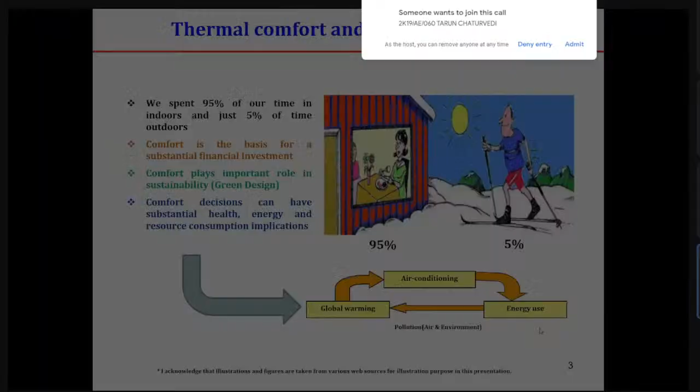Every year we have to spend a lot of money to restore that comfort. So it's very important that while we are designing a building, we should keep the local environment in mind, and also the thermal comfort requirement of the people in mind, and these two factors will govern our building design.

Comfort plays an important role in sustainability also. Comfort decisions can have substantial health, energy, and resource consumption implications, because if we move into a house and it is not comfortable, we will do certain changes to make ourselves comfortable. And since we cannot do anything about the external facade, we install air conditioning, because this is the only option we are left with.

What will happen if we install more air conditioning? We will use more energy, and since this energy is primarily sourced from conventional fossil fuels, it will lead to air and environment pollution, and ultimately it will lead to global warming. As global warming increases temperature, we will use more air conditioning, and this is a vicious cycle that will go on, and we want to break this cycle.

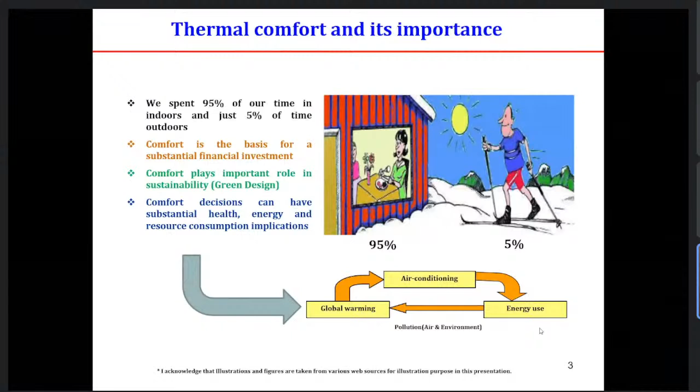So what are the challenges in thermal comfort study? The challenge lies in the definition itself, because as defined by ASHRAE, thermal comfort is that condition of mind which expresses satisfaction with the thermal environment. So it says that a subject in the environment is a passive recipient, and its inherent capability of adaptation and adaptive actions are ignored to a large extent.

So here, whatever environment is given to the subject, it accepts it. It is a passive subject, a passive recipient.

But when this definition is tested in the field, a large number of anomalies are reported, and then the concept of adaptive thermal comfort came into the picture, and it is included in the ASHRAE standard also.

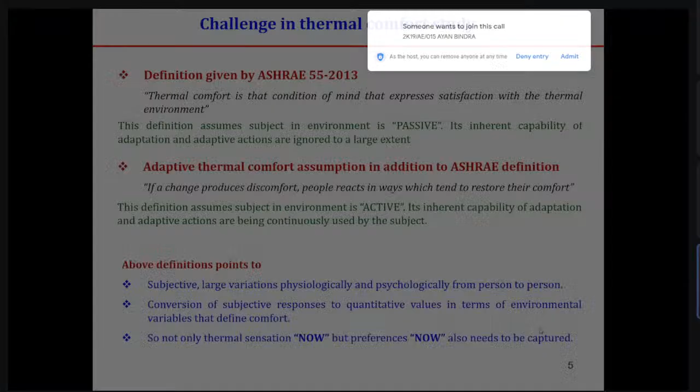It is defined as: if a change produces discomfort, people react in a way which tends to restore their comfort. So this definition tells that an occupant is an active ingredient of the environment, and always takes those actions which restore its comfort.

That is very much obvious if we look at ourselves in this context. So this definition seems to be more appropriate.

And what does this lead to? Because these definitions are subjective, they have large variations physiologically and psychologically from person to person. So the data which we collect has a large scope. And now we have a daunting task, because we have to convert all the data with some statistical tools.

So that we can give an environmental variable, some environmental variable, in a range that defines comfort. Like we have to give temperature range, humidity range, air velocity range in the built environment. So in this range, an occupant will be comfortable.

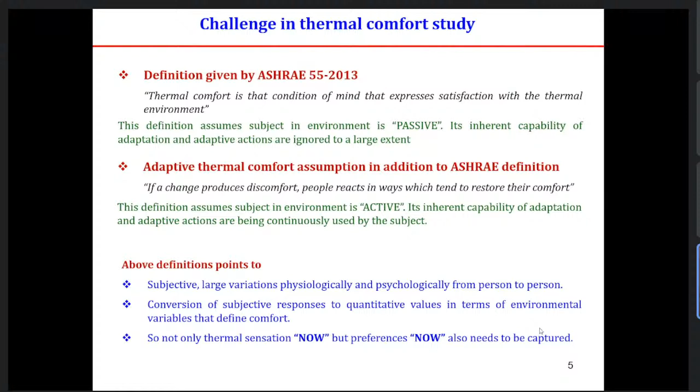So what we do when we go for field surveys is record the thermal sensation data. This tells us how the occupant is feeling now, and also what their preferences are now. So two 'nows' are covered: one deals with the present thermal sensation, and one deals with the occupant's preference, what he prefers. These are very important things that we capture in our field surveys.

Since we know that thermal comfort has a lot of energy implications, let's see the picture of world primary energy consumption. We see that the residential sector consumes about 21% of primary energy. Industry and transport are the highest consumers.

Overall, buildings are responsible for more than 40% of world primary energy consumption, because 8% is responsible for commercial and public services, and buildings are also involved in transport and industry sectors. This data is not segregated specifically, but if we take those things from these three sectors, the share of building energy consumption will go beyond 40%, and this is huge.

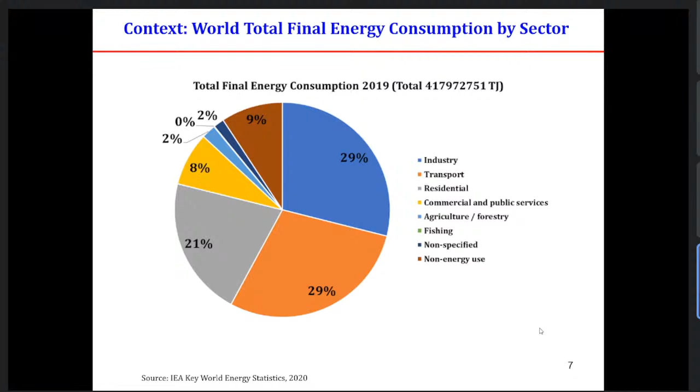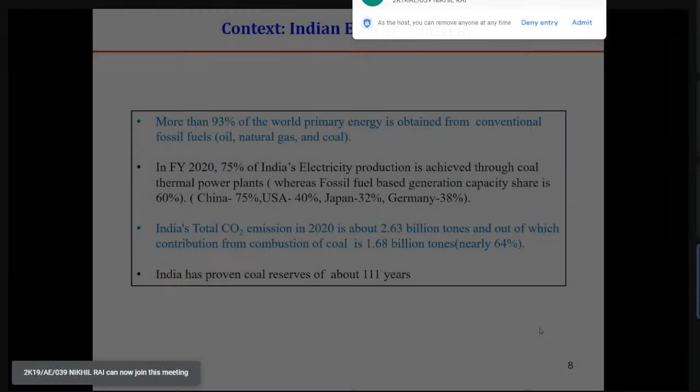In the context of India, more than 93% of the world primary energy is obtained from conventional fossil fuels. In fiscal year 2020, 75% of India's electricity production is achieved through coal thermal power plants. See this, from where our energy is sourced from.

India's total CO2 emission in 2020 is about 2.63 billion tons, and out of which the contribution from combustion of coal is 1.68 billion tons, nearly 64%. And India has proven coal reserves for about 111 years.

Also, we know that substitution, if we want to move to cleaner energy, it is financially intensive. So the substitution to clean energy will take a lot of money, and most countries are not ready for that. The similar case is for India. So for another 40-50 years, coal is not going to be replaced. That is a worrisome sign if we think about global warming.

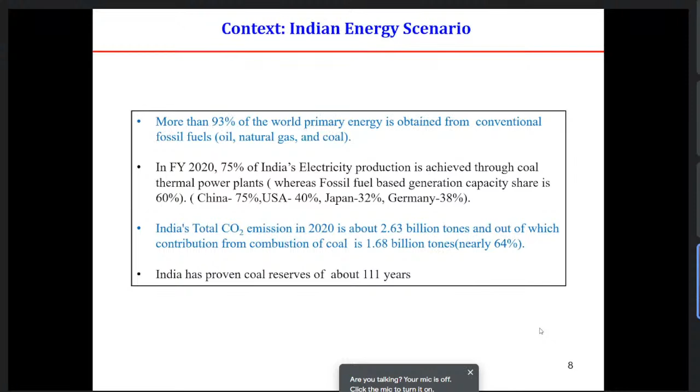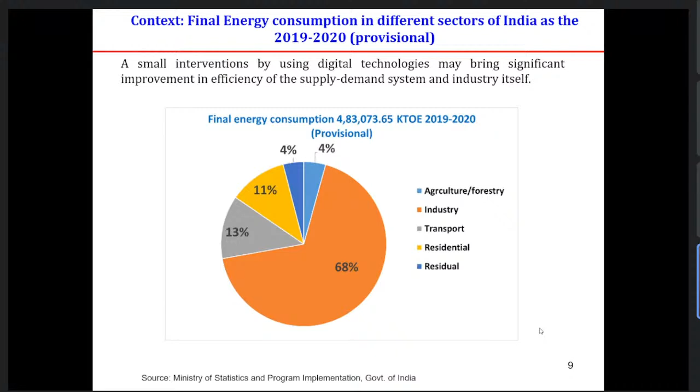But even if we see this picture, we can realize that if we carry out a small intervention by using digital technologies, it can bring significant improvement in efficiency of the supply demand system and industry itself. That is my intention, to say that now we have a lot of digital technologies. If we can use those technologies to improve this efficiency, then we don't have to install that much thermal power plants, and we can get rid of subsequent CO2 emissions.

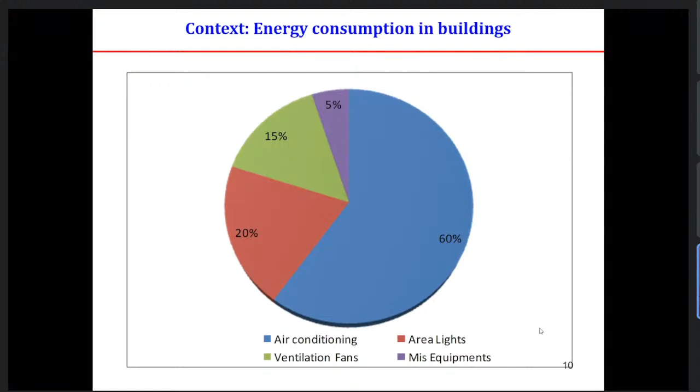Now I'll talk about thermal comfort research, new dimensions and directions. We have crossed 3 industrial revolutions, and now we are in the 4th industrial revolution, called the digital age. In the first industrial revolution, which happened in the 18th century, the main key technology is the steam engine based industrialization. The main factor driving the economy is steam engine based technology. We devised the steam engine and used it for industrial revolutions. The main driving factor is steam generation, and what we are using for producing steam is mainly coal.

In the second industrial revolution, the key industrial technology is electricity based mass production, the assembly line concept, and the main driving factor of the economy was oil and steam engine based technology. By the 19th century, oil was discovered, and we started using oil. In the third industrial revolution, the key industrial technology was computer and internet based knowledge concepts, and the main driving factor of the economy was oil. So in the 20th century, we can say it's an oil economy.

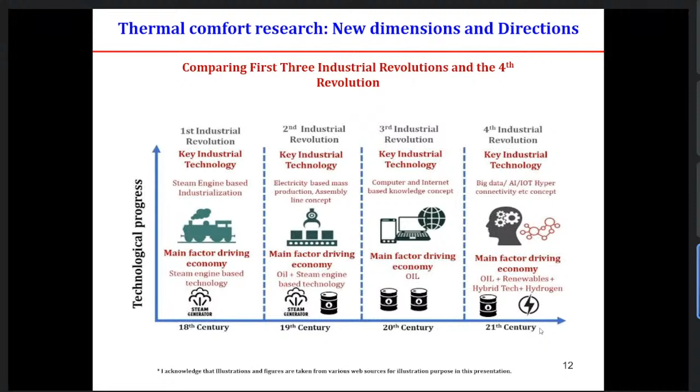These are the key components of industrial revolution 4: cloud computing, augmented reality, big data, autonomous robots, additive manufacturing, simulations, system integration, blockchain, cybersecurity, Internet of Things. These are some of the technologies that are being used now.

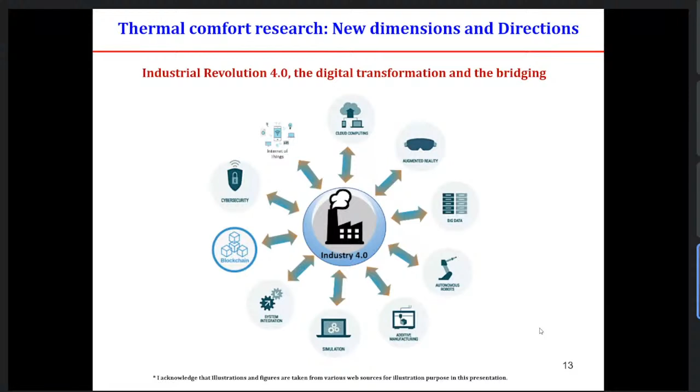So here we are talking about buildings. Buildings are very much related with people and their well-being. It provides some kind of sense of security, so it is very much an integral part of UN Sustainable Development Goals.

If you see Sustainable Goals 3, 7, 11, and 13, they are directly and indirectly related to thermal comfort studies, and we can say that they are the extended domains of thermal comfort study. The literature published in scientific journals does show some promising and interesting results, but there is still a big question, and we don't know how this will play out in coming years in the context of IR4.

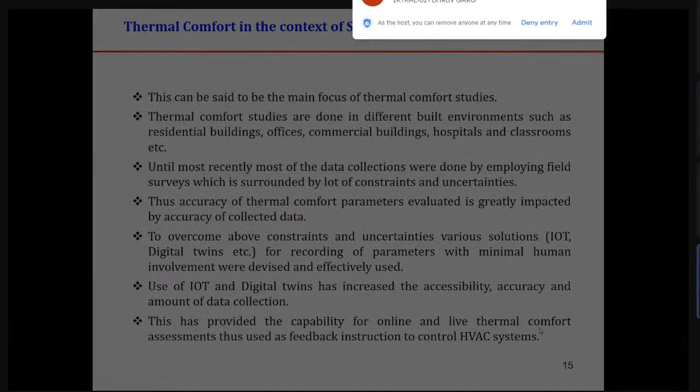So let's talk about Sustainable Goal 3, good health and well-being. This is said to be the main focus of thermal comfort studies. Thermal comfort studies are done in different built environments such as residential buildings, offices, commercial buildings, hospitals, and classrooms.

Until most recently, most of the data collection was done by employing field surveys, which is surrounded by a lot of constraints and uncertainties. Thus, accuracy of thermal comfort parameters evaluated is greatly impacted by the accuracy of collected data. To overcome these constraints and uncertainties, various solutions like IoT, digital twins, etc., for recording of parameters with minimal human involvement were devised and effectively used.

Use of IoT and digital twins has increased the accessibility, accuracy, and amount of data collection. This has provided the capability for online and live thermal comfort assessment, thus used as feedback to control HVAC systems. Since these are live feedback mechanisms, I will discuss with you one of the examples.

Professor Richard de Dear in Sydney was studying this, and they took a 5-story office building with more than 500 people sitting in this office. They started monitoring with online systems, and what they found is that when people enter the office at 9 a.m., they increase the HVAC set point. So they put it at 22 for cooling.

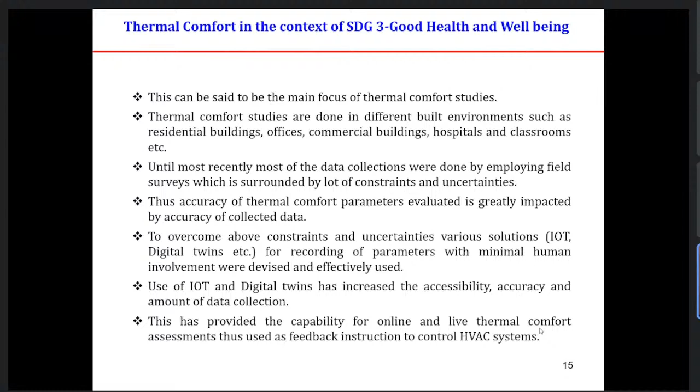Now, thermal comfort in the context of Sustainable Goal 7, affordable and clean energy. This is indirectly associated with thermal comfort studies, and we can say it's an extension. It is widely accepted that occupant behavior influences energy use and pattern in a building. Building integrated PV, ground source heat pump, district heating, solar domestic hot water system, etc., are some examples of clean and affordable energy.

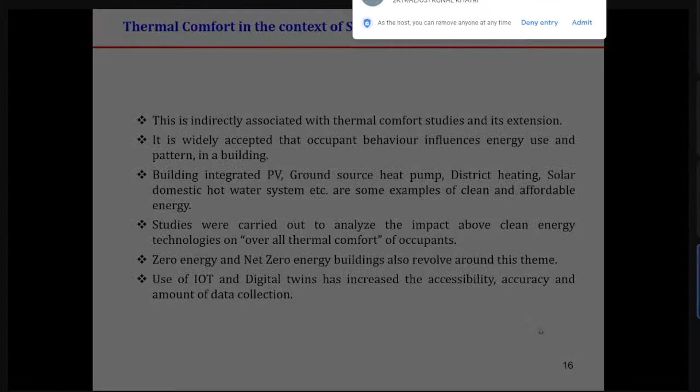Studies were carried out to analyze the impact of these clean energy technologies on overall thermal comfort of occupants. Zero energy and net zero energy buildings also revolve around this theme. Use of IoT and digital twins has increased the accessibility, accuracy, and amount of data collection.

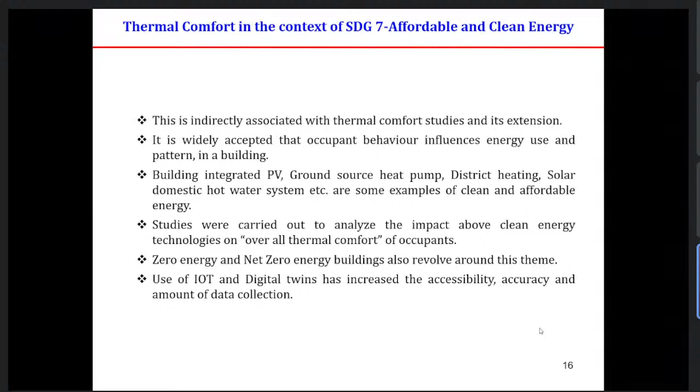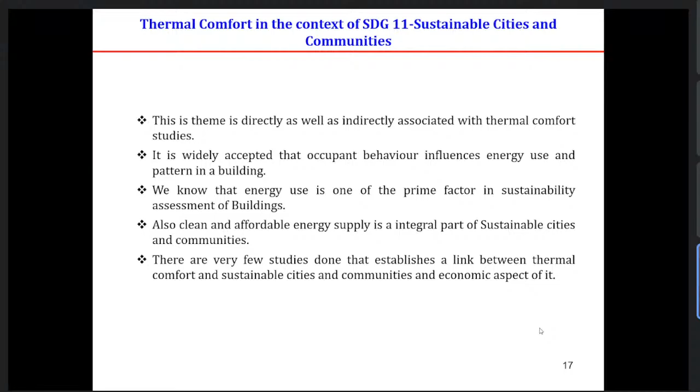Now, thermal comfort study in the context of Sustainable Goal 11, sustainable cities and communities. This is a theme directly as well as indirectly associated with thermal comfort studies. It is widely accepted that occupant behavior influences energy use and pattern in a building, and we know that energy use is one of the prime factors in assessment of buildings. Also, clean and affordable energy supply is an integral part of sustainable cities and communities.

There are very few studies done that establish a link between thermal comfort and sustainable cities and communities and the economic aspects of it, so we need more study in this regard.

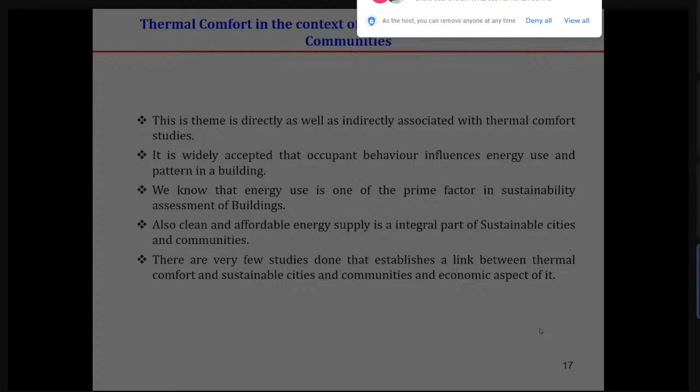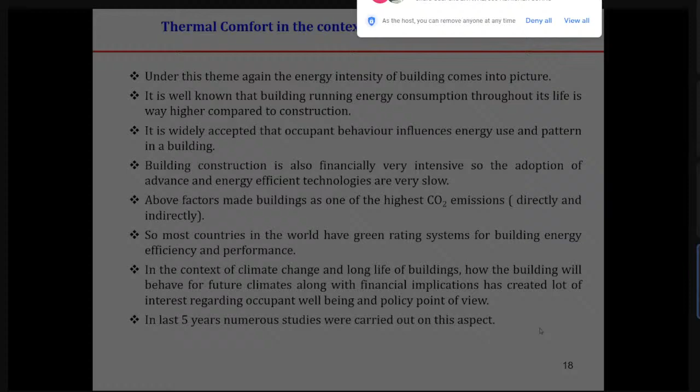Thermal comfort in the context of Sustainable Goal 13, climate action. Under this theme, again, the energy intensity of buildings comes into picture. It is well known that building running energy consumption throughout its life is way higher compared to the construction. It is widely accepted that occupants' behavior influences energy use and pattern in a building. Building construction is also financially very intensive, so adoption of advanced and energy efficient technologies is very slow. Above factors made buildings one of the highest CO2 emitters, directly and indirectly.

So most countries in the world have a green rating system for building energy efficiency and performance. In the context of climate change and long life of buildings, how the buildings will behave for future climates along with financial implications has created a lot of interest regarding occupants' well-being and from a policy point of view. In the last 5 years, numerous studies were carried out on this aspect, and this is still a very hot topic where a lot of research is going on, mainly simulation based studies.

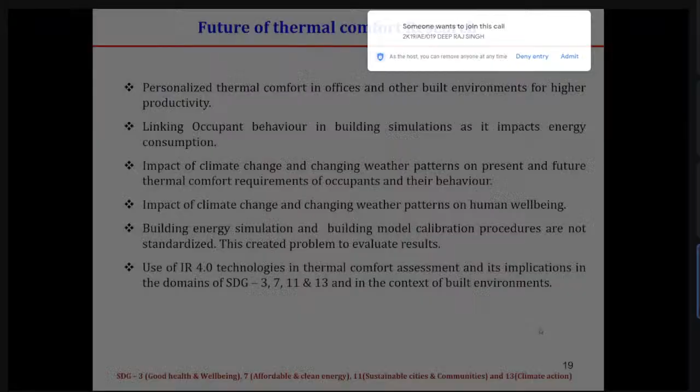Building energy simulation and building model calibration procedures are not standardized. This created a problem to evaluate results. This is the biggest issue because all these studies are mainly simulation based, and somewhere we need to calibrate the building model with the base case where we carried out some measurements, and this calibration process is not standardized.

So we are trying to publish some papers, maybe in 2 or 3 months it will come out. There we have put emphasis on how to calibrate a building model, and that same model, once calibrated, will be used for running simulations for different cases for future climates.

Use of IR4 technologies in thermal comfort assessment and its implications in the domains of sustainable goals 3, 7, 11, and 13, in the context of built environment. So here I have listed where this thermal comfort research is going. We will see a lot of papers coming in this direction in future.

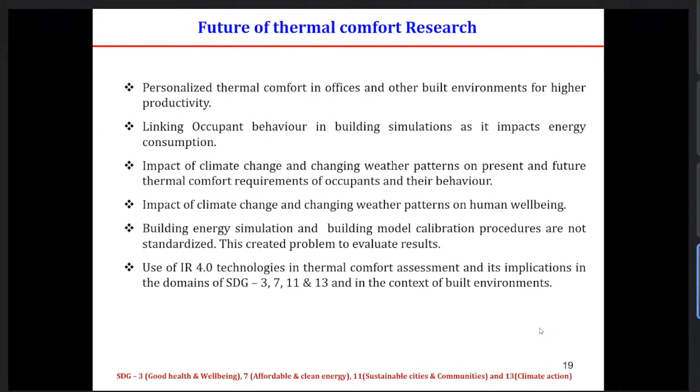Now I'll talk about my experience of research in different built environments. First I will discuss the research that I carried out in traditional residential buildings of Northeast India.

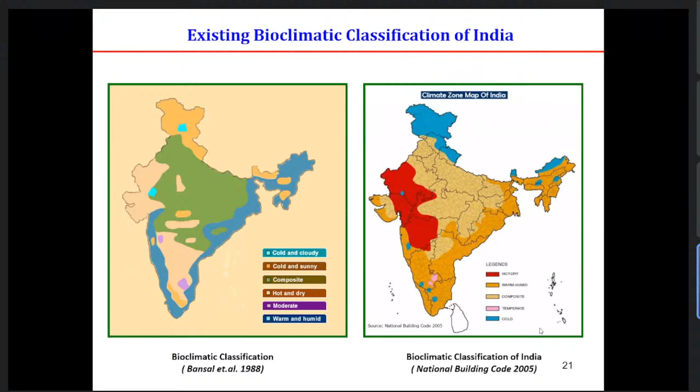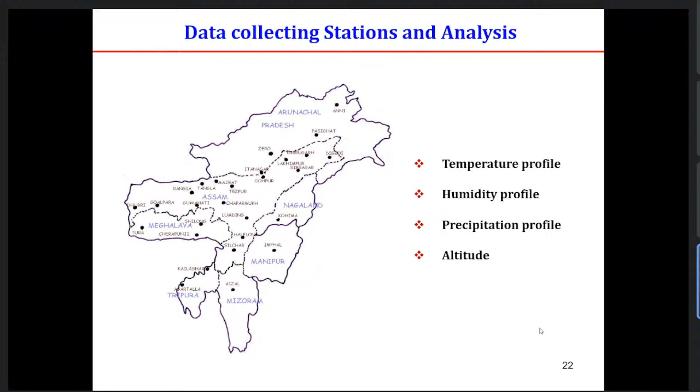After analyzing the data, we found that there exist three distinct climatic zones: warm and humid, cool and humid, and cold and cloudy climate zone. One is the highland climate zone, which is just snow-clad mountains throughout the year, so very few people reside there. But mainly there are three bioclimatic zones.

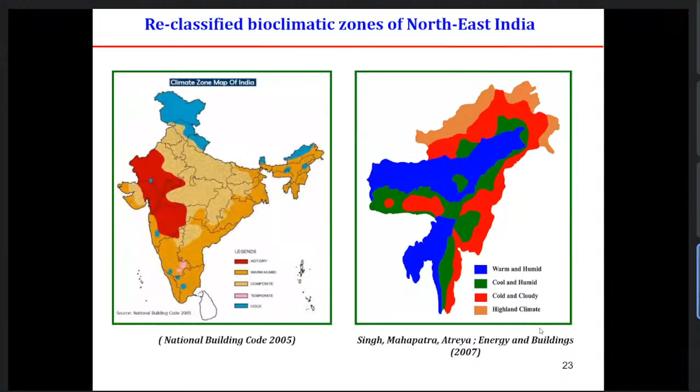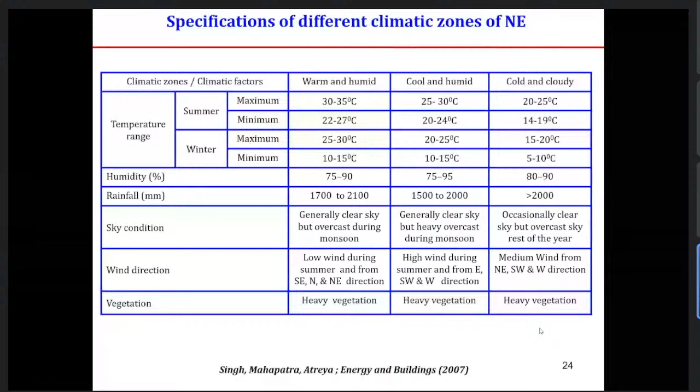These are the specific information about the classified bioclimatic zones: summer and winter maximum and minimum temperatures, humidity range, rainfall range, sky condition, wind direction, and vegetation. We also used to estimate the passive design strategies potential in these three climatic zones. These are the passive design strategies potential.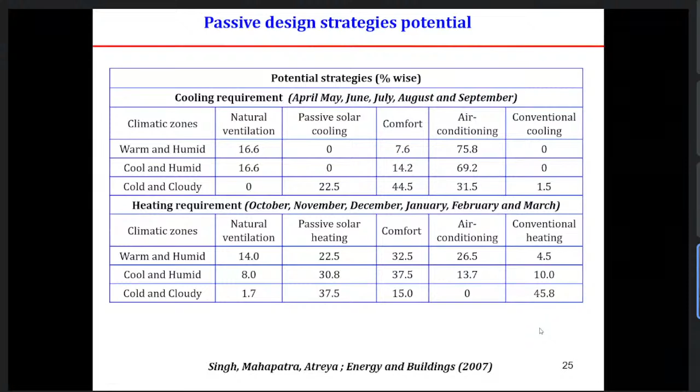Once the bioclimatic classification was done, it needed to be supported by the features found in existing traditional architecture that are more than 70 to 80 years old. So I carried out surveys to list out the solar passive features in these buildings, just to know whether these passive features found in specific climatic zones are in line with my bioclimatic classification. This way, it's a validation of my bioclimatic classification.

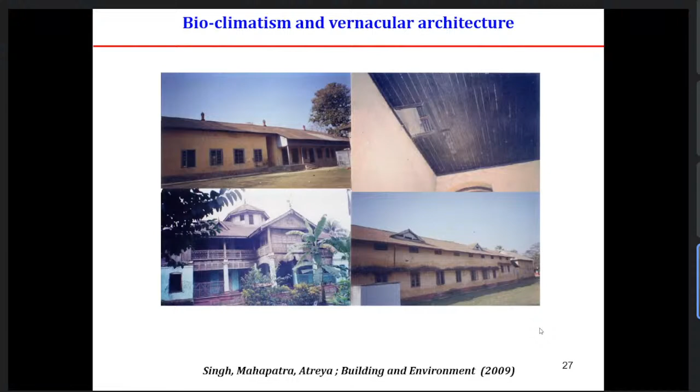These are some ventilation techniques that I found in warm and humid climate. This is the shading techniques in warm and humid climate. These are in line with my bioclimatic classification.

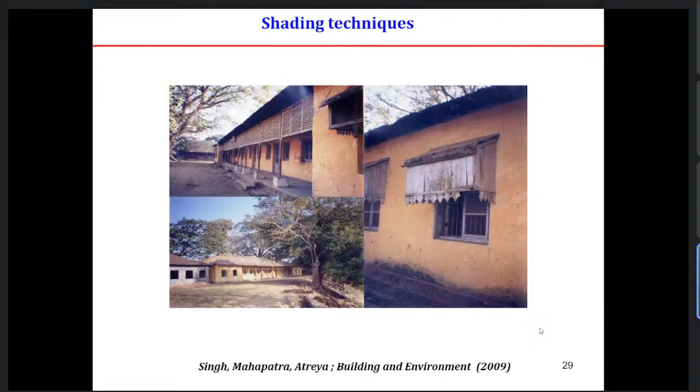These are the architecture of cold and cloudy climate. So here we see, this is a picture from Shillong, and you see this compactness of the house, the size of windows and doors, and they have used locally available material, stone blocks, to build the house. The walls are very thick. Also, they have a heating place in the living room.

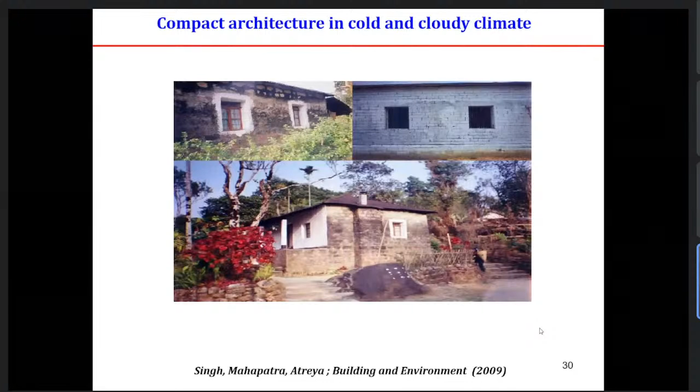Then I carried out a thermal performance study in these houses. So I selected 3 houses, like one in each climatic zone, and I monitored it for 1 year.

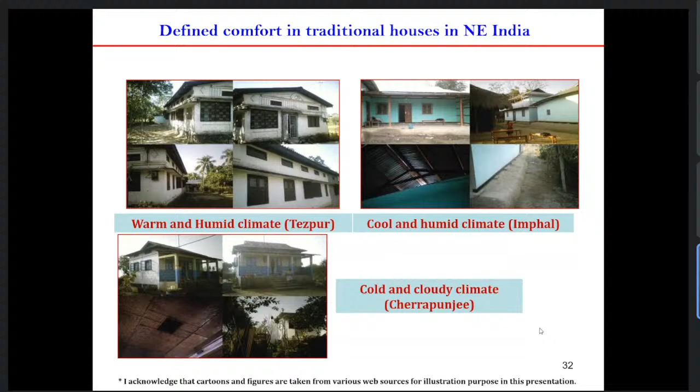So this is the house that I selected to monitor. The first house is in warm and humid climate. This is called Assam type, it's very popular. One is in cool and humid climate, that is in Imphal. This type of houses are also very popular. And one is in cold and cloudy climate in Cherrapunjee that I monitored for 1 year.

These are some of the statistics about how many subjects participated in my survey, how many houses I covered, what is the age, how many male, female.

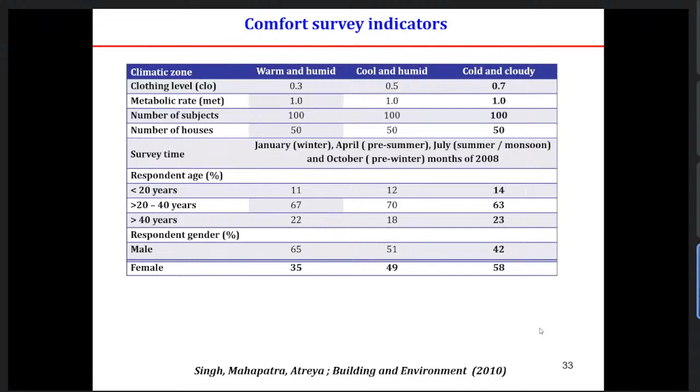So I found that the neutral temperature goes on decreasing from warm and humid climate to cold and cloudy climate. For warm and humid climate, the neutral temperature is around 26 degrees, cool and humid climate it is 24 degrees, and cold and cloudy climate it is 22 degrees. So there is a gradual decrease in the neutral temperature, and neutral temperature is defined as the temperature at which the occupants did not report any discomfort. They say that they are comfortable, thermally comfortable.

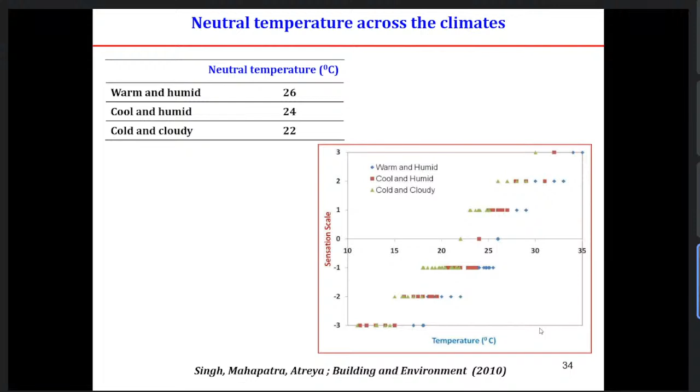And I also reported the thermal comfort range, because neutral temperature is good, it gives information, but it is very particular information, and based on this, a building designer or architect finds it very difficult to design a building specifically for that. So there has to be a range of temperature. If we give a range, it becomes easy for an architect or building engineer to integrate some solar passive features, so that if there is a fluctuation, he can manage within that range.

So I found that for warm and humid climate, the comfort temperature varies from 22.8 degrees to 29.1 degrees, throughout the year this is the range of comfort temperature. For Imphal, it is between 21.1 and 27.6. And for Cherrapunjee, which is cold and cloudy climate, it varies from 18.9 degrees to 26.7. So in all these climatic zones, almost a 7.5 degree range is there.

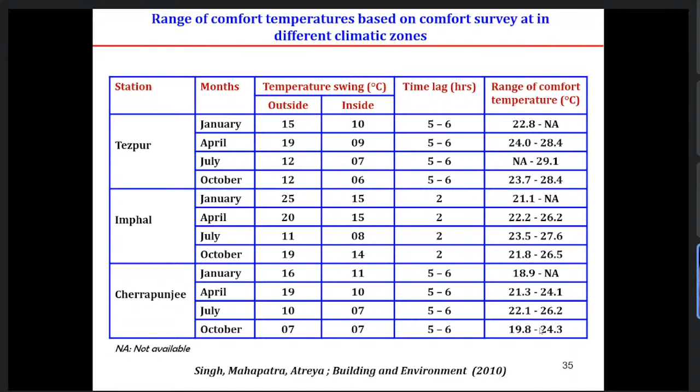So in this research I also got an honor to write a paper with Professor Givoni, who is a very renowned scientist in this area. He has given a lot of bioclimatic tools, which are very helpful for architects designing climate oriented buildings. With him I learned this technique and developed a predictive formula to predict indoor temperatures of buildings if we know the outdoor thermal conditions, because it's not always possible to go and monitor all the houses. So if we can monitor a representative house, we can use this technique to predict what the temperature will be in that house in a particular season.

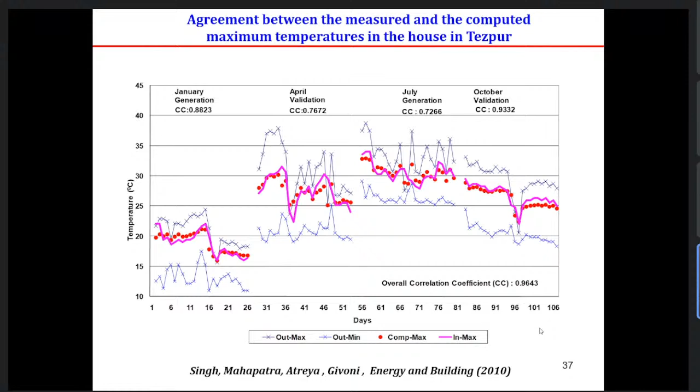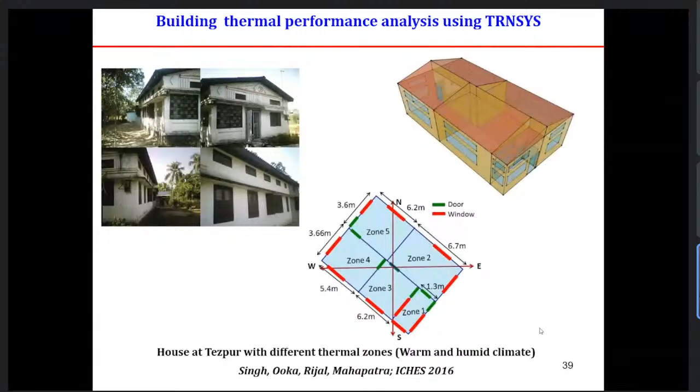So this is the technique. And then I also tried to integrate occupant behavior in building energy simulation. This is the house that I monitored in warm and humid climate, so I used TRNSYS to model this building. During the survey, I found that the occupants were opening and closing the window at particular times, and then I recorded the corresponding temperature, and devised this strategy.

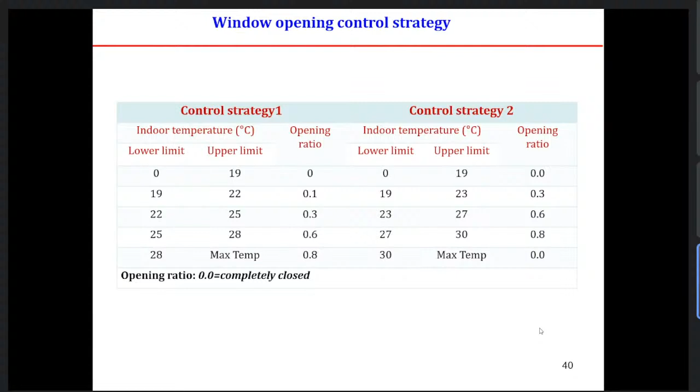So control strategy one that I got from the surveys, and control strategy two that I assumed, and now I try to see what is the impact of these two control strategies of opening and closing windows on the indoor temperature of the building.

So after analyzing the data, I found that control strategy one is very effective. The occupants are using the operation of windows wisely to enhance the comfort in the building. By employing strategy one, there is a reduction of temperature up to 2.5 degrees in the building.

But on the other hand, control strategy two is leading to temperature buildup, up to 4 degrees in the summer month. This is the simulation. On the x-axis, you see the number of hours in a year, and in the center, from 2921 hours to around 5841 hours.

This is the peak summer season, starting from May end to around July and August middle. So you see there is a temperature buildup for strategy two, which I devised, and for strategy one, there is a reduction in the temperature that I got from the surveys.

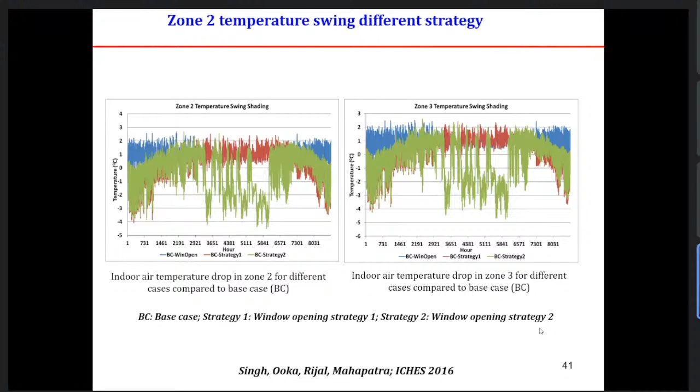Same for the next figure. And also, since the previous analysis is just giving the reduction in temperature, I wanted to know what is the impact on monthly comfort duration.

So what I did is extract the data that lies between the comfort range, as presented in the previous slide. I extracted the number of hours from the simulation results where the indoor temperature lies in that range.

Here again, I found that for strategy one, there is a lot of improvement in the comfort duration in summer season. Same is for zone 2.

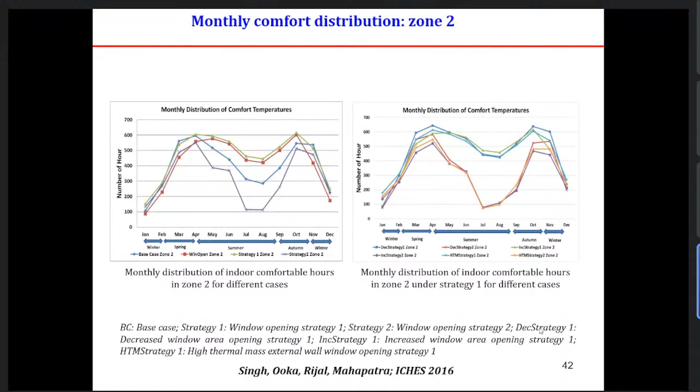Also, I studied the effect of cool roof, and this study was suggested by Professor N.K. Bansal. He is no more now, but he suggested that he wanted me to study the effect of cool roof, because a lot of reflective white paints are coming, and many industries are promoting it. He asked, can you do this for me?

I said okay sir, I will do the simulation. So I did the simulations and showed him the results, and he was very happy to see that. We had very long discussions on this, and some of the results I will show. I also presented this in an international conference.

For this, I took a sample building. The dimensions are shown here, and on the bottom left hand side you see the roof configurations that I used for this study. There is a roof slab, and above that I put a white paint, and for another case I put a roof slab and then insulation on top, just to see the impact.

And these are the thermophysical properties of the building materials that I gave as input to this model.

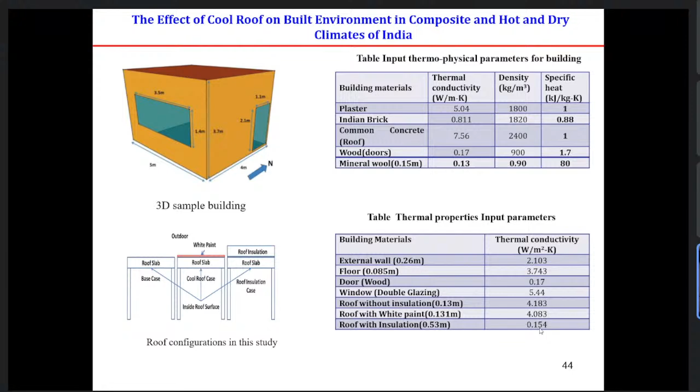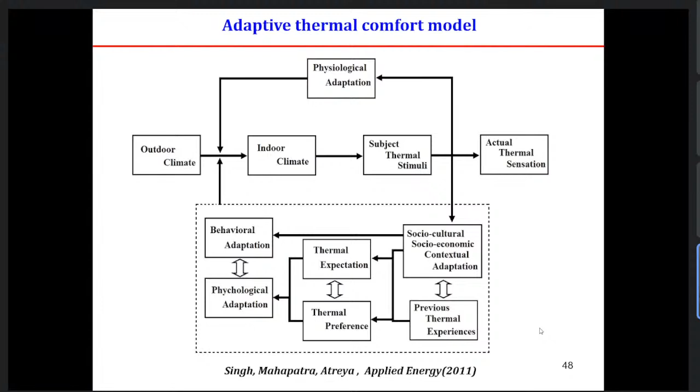So this is the adaptive thermal comfort model, how it and occupants interact and how its behavior affects its sensation. And this is the formula where lambda is the adaptive coefficient, and PMV is the predicted mean vote.

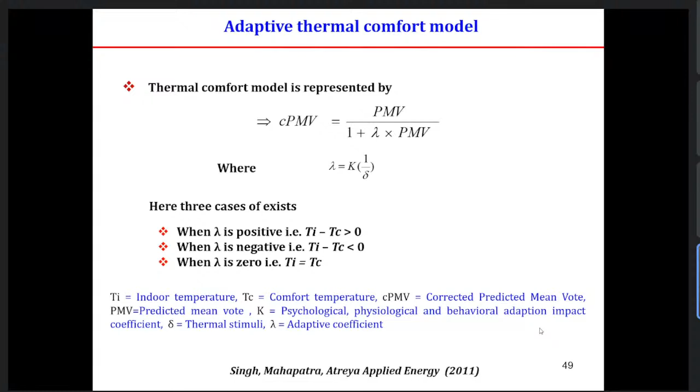You see in the winter season, the pink color dots are from the PMV, and the blue dots are from the actual field survey data. So there is a deviation.

So when this correction factor is applied to the PMV data, they become aligned to the field data. Same is for summer - there is a deviation, but when this corrective term is added, the data align with the field data.

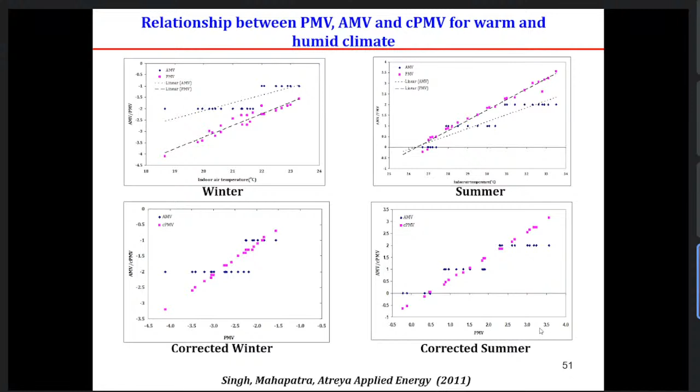It is crossing about 230, 250, and the Europe standard at that time was around 130 something, so it is almost double of that. The Belgian government wanted to reduce this building heating energy consumption, but their program failed - people did not go for it. So they wanted to know the reason behind it, and so I carried out this study.

To carry out this study, I took their general survey data. It is mandated that every house owner fills an online or offline form giving every detail about the building: the composition of the wall, how old the house is, what kind of window - single or double glazing, whether there's insulation and what type, what kind of boilers they use for hot water circulation in the radiators, how old that is, what kind of fuel they use, what is the electricity consumption, and so on. It's a lot of data they have to put.

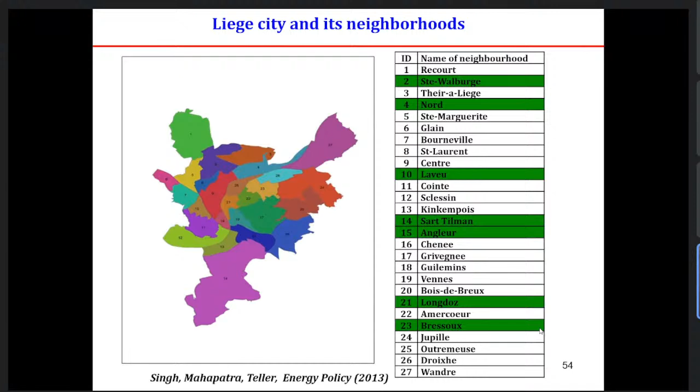So I focused on this, and I also did some literature survey on the energy consumption of Belgium with respect to the EU 27 countries, and what sectors consume more, what kind of fuel households use. You see in the bottom left figure they use oil products and natural gas a lot. And what kind of houses - they have a large number of houses which share two facades, and single houses are also in large numbers.

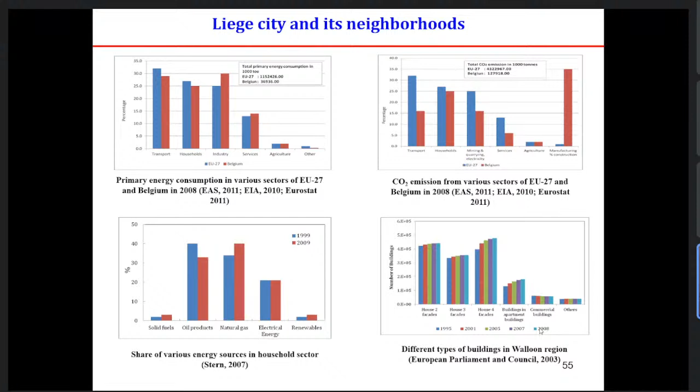So I also segregated all these things - how these historical houses break down based on age, shared facade, and type of fuel they use. I segregated everything based on this to generate information.

Also the distribution of the houses: a large number of them lie between 1920 and 1944, because they were constructed or renovated between that time. New construction is very low.

Also the city center has the highest number of buildings with shared facades, meaning almost two sides. A building has four facades in four directions, so two facades are shared. This kind of house is concentrated in the city center. This is obvious because of space constraints and apartment concepts, so only the front and back of the building are exposed to the air, and the other two directions are shared by other apartments.

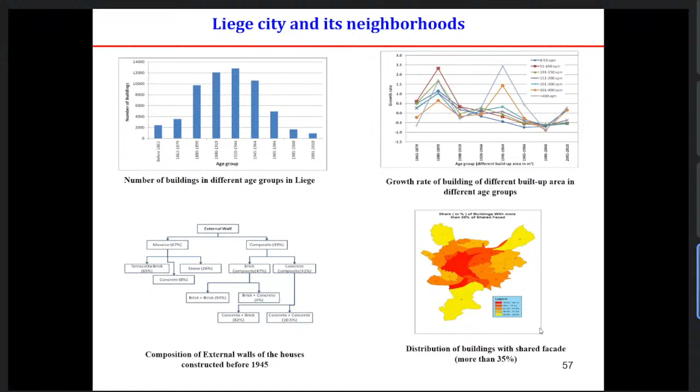I also monitored the houses to know how their heating system is performing. I found that one house has manual control, and since it's manual, there is a lot of fluctuation in the indoor temperature because the control is not swift. Whenever they feel it's too hot, they reduce the heating, and when they feel it's cold, they increase it. That's why we observe a lot of fluctuation in this house.

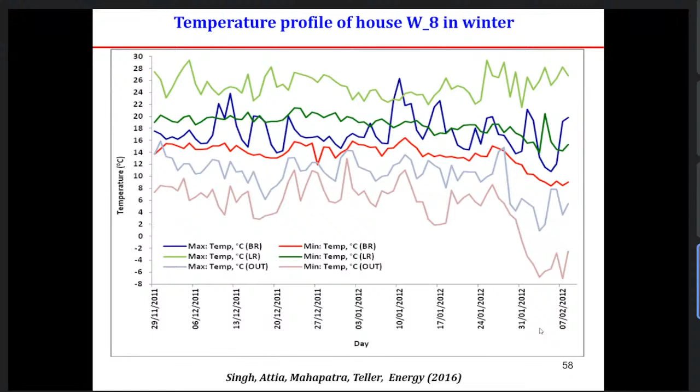They have recommended large renovations improving insulation, and the structure of the house is such that the bedroom is generally on the top floor. So if it's a two or three floor house, the bedroom will be on top, with a large external facade that has glazing. The glazing is double glazing, but it still allows sun to come in.

Also in summer, the daytime is long, starting around 7:30 and lasting until evening 7:30 or 8. So at that time they receive sunlight, causing overheating, and all of Europe is facing this problem. Now they are working on affordable cooling technologies, and the IEA has formed a task force looking for affordable cooling technologies for European homes.

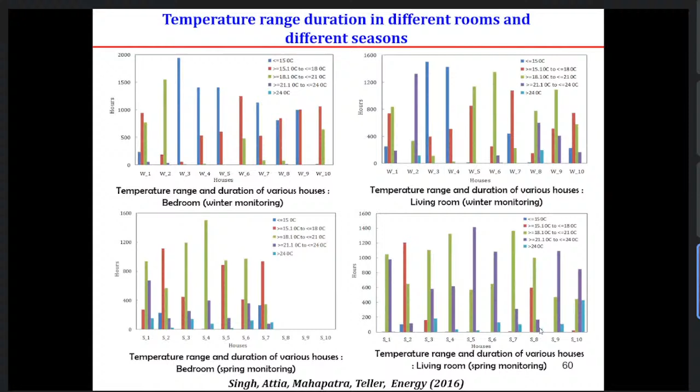So these are my findings, so I told them, and now they are still working on it.

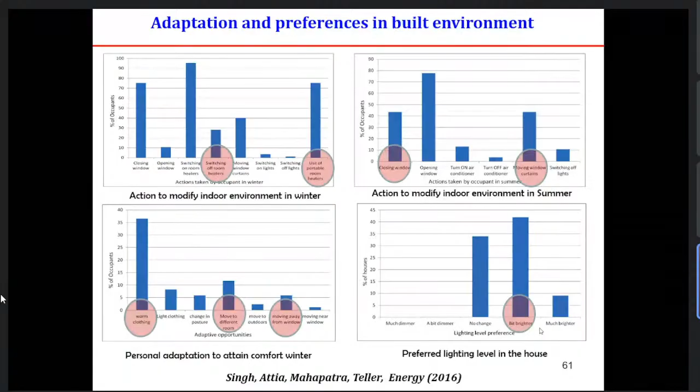These are some of the adaptations occupants were taking in the buildings. They're switching room heaters on and off, using portable heaters. It shows that their rooms were not evenly heated, even a single room was not evenly heated. So they are also using warm clothing, moving away from the window, moving to different rooms. Almost all the houses that I surveyed or monitored, the occupants preferred a bit brighter light, so their lighting level is also low.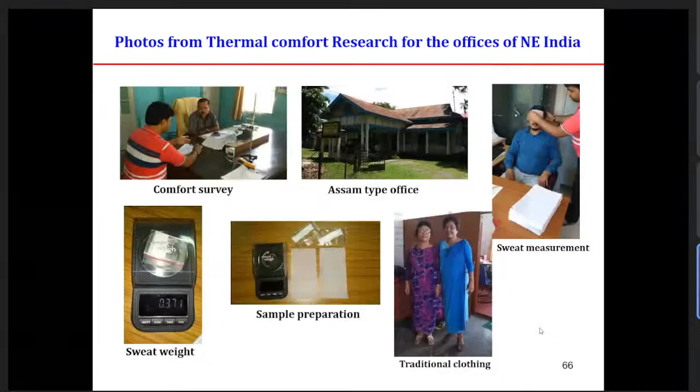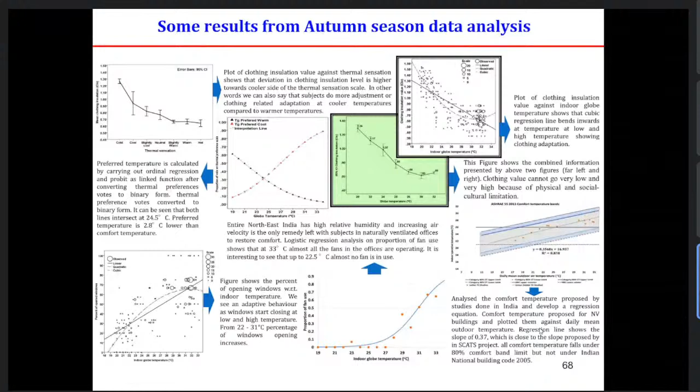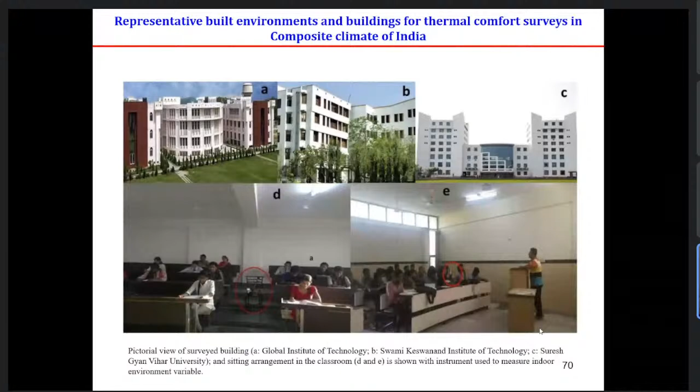So, study in academic classrooms. This study was done in Jaipur, which has a hot and dry climate. It lies in the composite climate zone of India. This study was done with a sample size of almost 2,400.

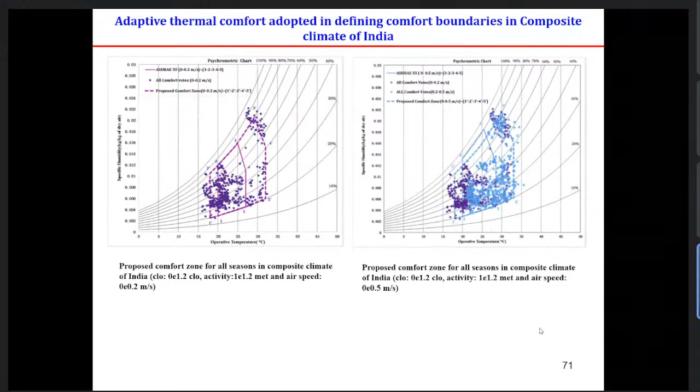We found that ASHRAE comfort boundaries do not define the comfort accurately. So what we did is use all our data to define new comfort boundaries for the composite climate of India. This defines the comfort boundaries, which we proposed in our publication.

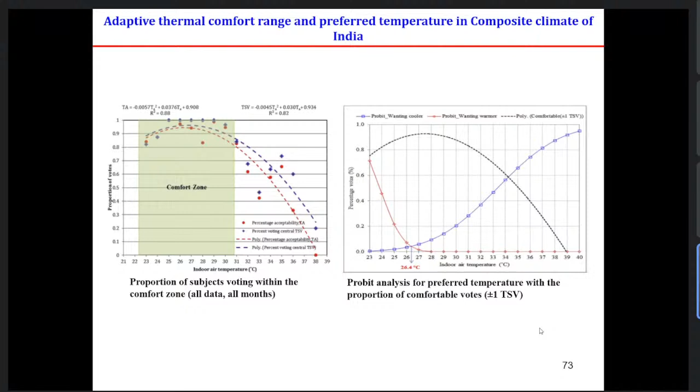So we see relatively higher comfort reporting from the students. This is about the status of thermal comfort research in classrooms. Still, there are very few studies done. To date, only about 89 articles have reported a study on classroom thermal comfort.

This area is very important because classroom comfort affects the students' ability to learn, and classrooms are mostly controlled by faculty members like teachers, who come and regulate them. This is the breakup. This study was published in 2019, so it's a bit old, but at that time that was the status — very few research articles were published on this.

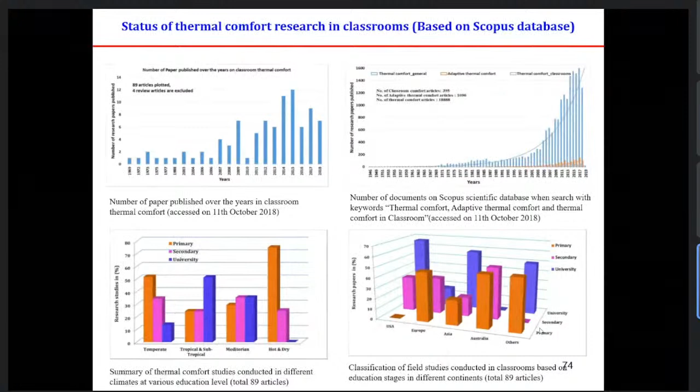The reason behind it is that nursery students cannot express their thermal feeling, and generally their dressing and the temperature control of the room have to be dependent on the teachers, or the clothing has to be decided according to the parents. So this was the main reason.

But university students can express their feeling, and they have some amount of control over the devices that impact the indoor environment, like switching on fans, controlling fan speed, switching on and off AC if there is one, or opening and closing windows. So these controls are available, and university students can use them effectively, which is why they are very sensitive to change in classroom temperature.

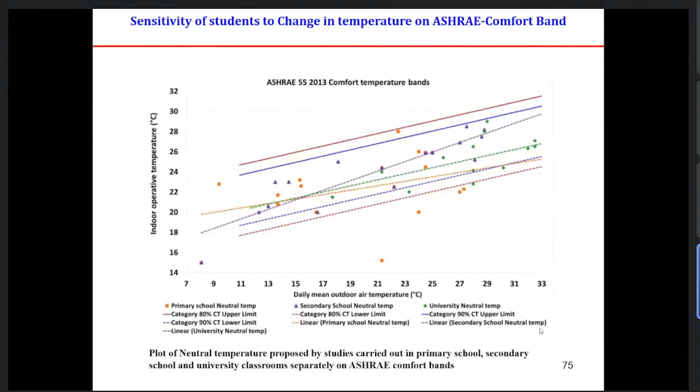This shows the range of comfort temperature that has been reported in the literature. Again, university classrooms have a much higher range.

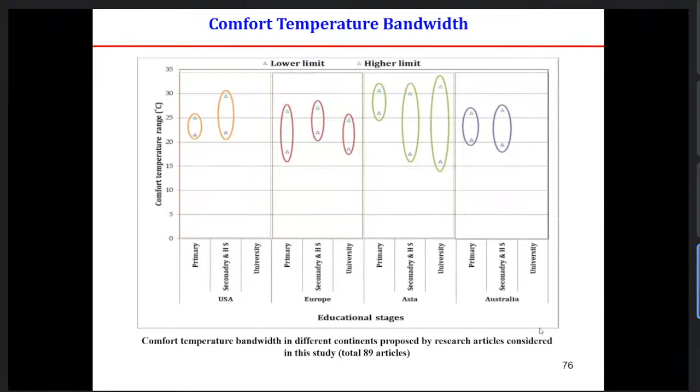Then, thermal comfort status in industrial buildings — we studied this in a Jaipur building, and this study was carried out during the COVID time. So what is the impact of using masks and sanitizers? We also tried to cover this and the occupants' view.

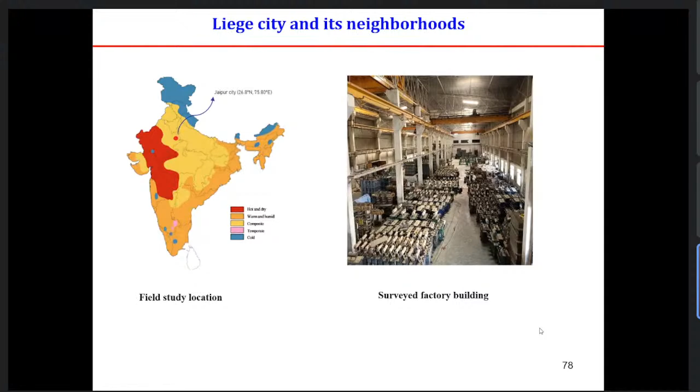This shows the range of temperature that people reported as comfortable. No doubt 35 degrees Celsius is very high, but this is the industrial environment where they use a lot of high velocity fans, so there is some compensation with the high wind velocity. In this range, more than 80% of the people reported themselves comfortable.

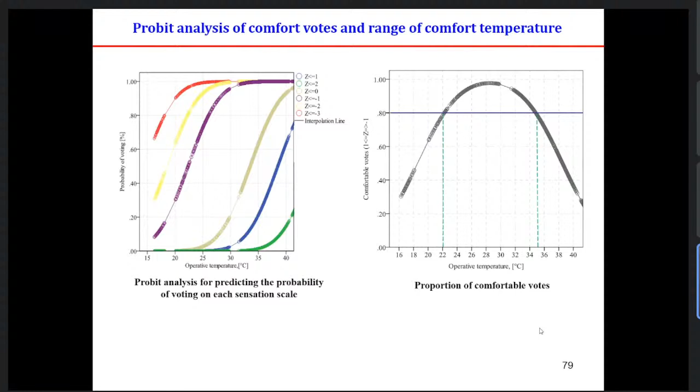Again, this is the clothing pattern, showing non-linear behavior with respect to the outdoor temperature. Here the workers said that using face masks, they found it irritating and suffocating. They also reported bad odors and difficulty in doing work. These are some of the major factors people faced when using face masks while working in the industrial environment.

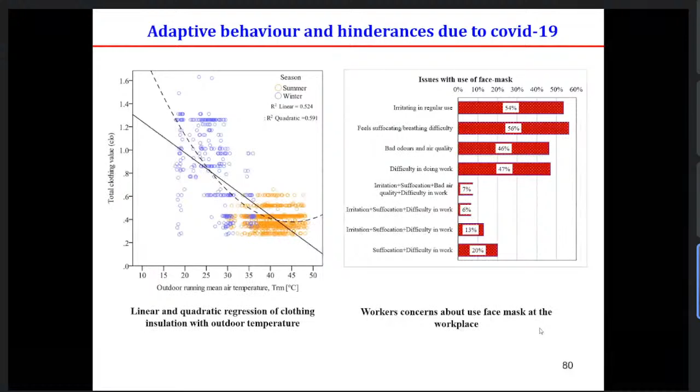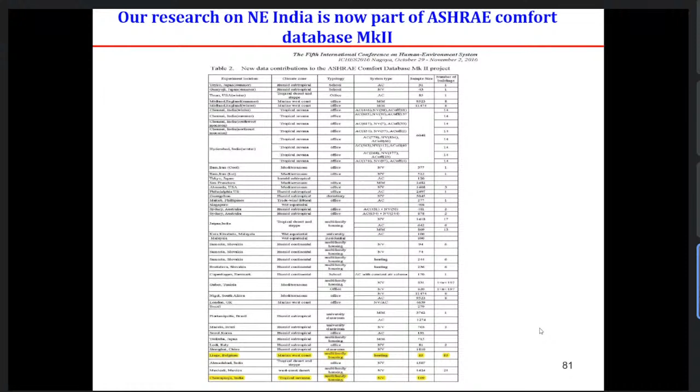This is about our ASHRAE comfort database MK2, where the results from our study are all incorporated. These are highlighted here. So that's all from my side.

Hello. Hello. Yes sir, yeah, so I just completed my presentation. Yes, yes. And now it is for the audience.